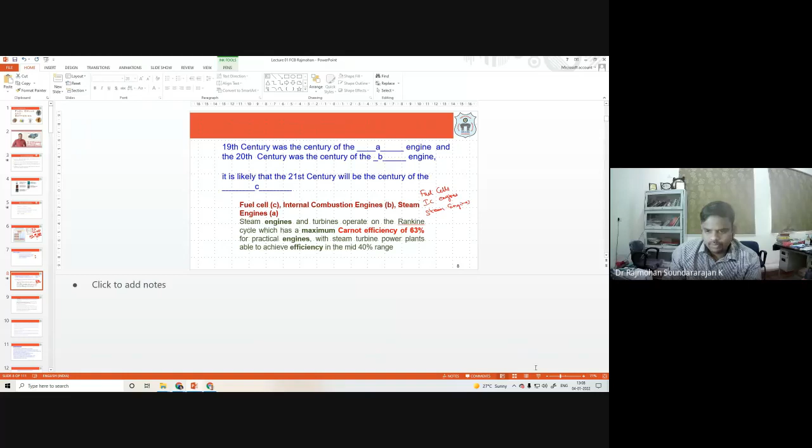Good. A is steam engines, B is IC engine, C is fuel cells. So that's what being projected. But still, this statement was told with the view of the efficiency of the IC engines, efficiency of the steam engines, and what are the drawbacks associated with each.

When we move from one to another, it will have some drawbacks. For example, say you want to shift from one person to a next person who is better. So what you try to do is improve your drawbacks to stop that movement. So we try to improve ourselves, and that can delay the movement from here to there.

For example, we have been saying that across centuries we are moving from steam engines to IC engines, and IC engines to fuel cells. So why this has not happened so far is because there has been improvement in reducing the drawbacks associated with the IC engines.

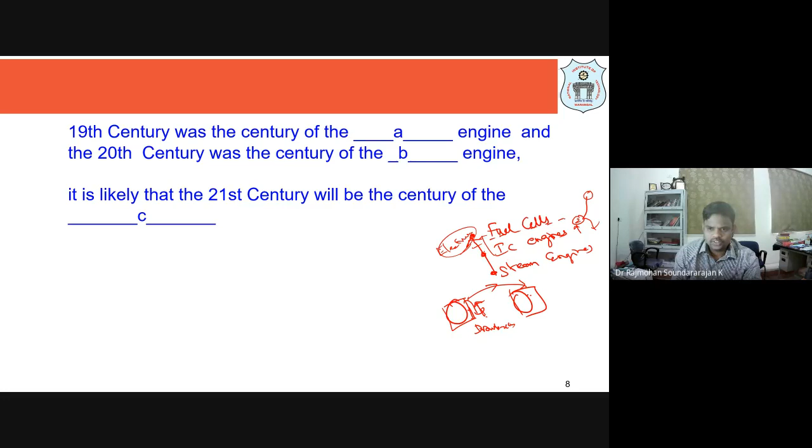For example, when we started, some inefficiency was there, that has been addressed. The polluting emissions have been reduced. So when we work towards that, we are withholding people from moving from this to the next. For example, electrical bikes, electric vehicles—we stop people moving by reducing the operating cost associated with it. When you improve efficiency, the operating cost reduces. So that way we are reducing the drawbacks which are holding the shift from IC engine to fuel cells so far. So the answer is, fuel cells may be occupying the total transport vehicles in future.

IC engines have been on roads in the 20th century. In the 19th century, we had steam engines occupying the roads. We know the basics of thermodynamics from our UG course—I hope all of you are from a chemical engineering background. We know that steam engines and turbines operate on the Rankine cycle, and we know the limitation of Carnot efficiency. We have a maximum Carnot efficiency of 63%, applicable for practical engines. If you look at steam engines, they were able to achieve efficiency only up to the mid 40s, like 45%.

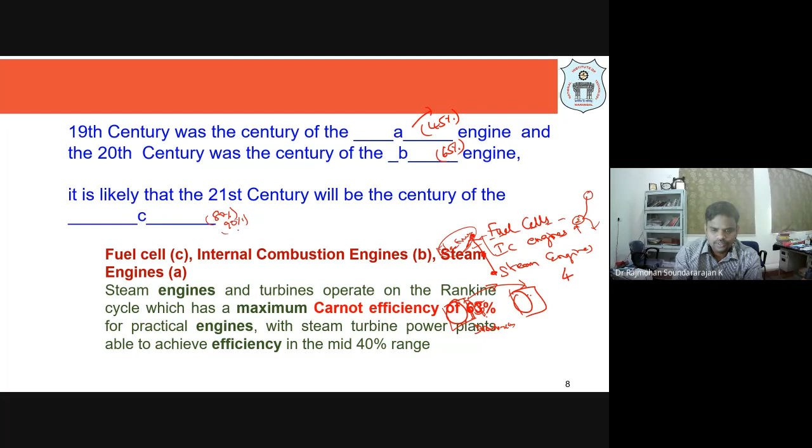That efficiency is what is making people shift from one to another. So whatever a steam engine had, an efficiency of 45%, and this one having an efficiency of 65%—we want to move to something which can have an efficiency of 80 to 90%. That is the objective behind the shift.

So for that, what is energy conversion efficiency? It is a factor which keeps on increasing. As I told you, people keep working on the present thing and try to improve the drawbacks and increase the energy conversion efficiency. If you want to define energy conversion efficiency, it is the energy output in the form of electrical energy to the energy input in terms of chemical energy.

For example, in the 20th century, the efficiency of central electricity generating stations—in models, small scale or pilot scale, they may have had more efficiency, but in actual power generating stations at the beginning of the 20th century, the efficiency was just about 10%. Particularly the average for fossil and nuclear power—once nuclear power plants came, efficiency increased to 33%. Now we have several types of power plants where we have a combined cycle—not just hydro, not just solar, not just heat. In that case, we are able to reach an efficiency of up to 60%.

These newest combined cycle combustion turbines are a combination of a gas turbine, similar to that used in jet aircraft, and a steam turbine. Usually they burn natural gas, and currently they account for over half of the new electrical generating facilities being installed worldwide, not just in India. Worldwide, this type of combined cycle combustion turbine is being used so that we have better efficiency.

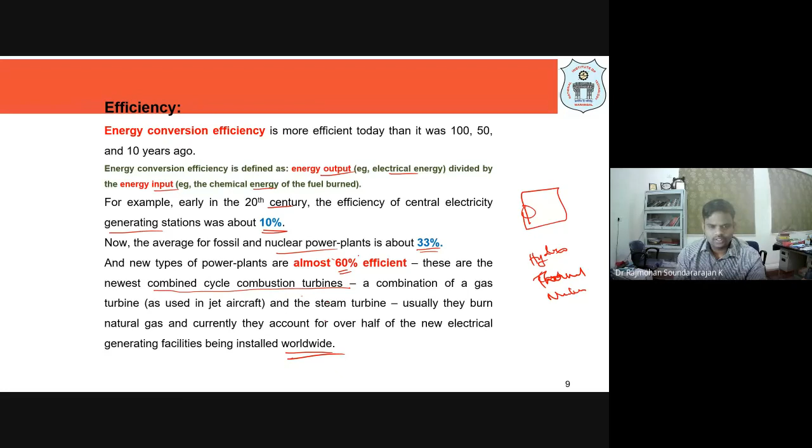Rather than simply hydro, simple coal combustion—meaning thermal—or simple nuclear, when you have this combined cycle, the heat that is generated is also being utilized efficiently, so that means zero is going as waste. Whatever is being generated in a power plant, all the energy is being utilized to get an electrical energy output. That's the combined cycle combustion turbine.

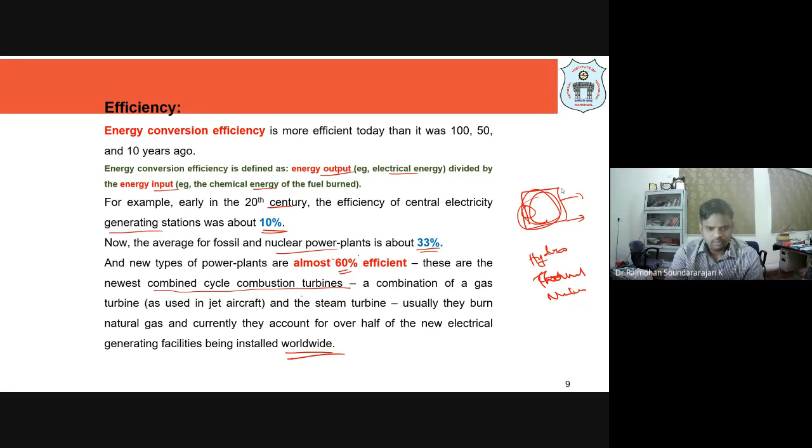As I told you, the efficiency of gasoline engines has been steadily increasing because of developments occurring based on research output provided by chemical engineers, mechanical engineers, physicists, and chemists. This has happened mainly because of two factors: one is our ability to use higher compression ratios, which is controlled by our ability to burn the gasoline without any spontaneous explosion in the cylinder.

Earlier, material of construction was a constraint—we were not having proper materials for high temperature applications. Say, for example, the temperature is beyond 400, 500 degrees. We didn't have non-corrosive, thermal resistant, or mechanically resistant materials.

Proper materials were not there before, but now there is introduction of new materials. We are able to operate at better conditions and control the system with proper control. Process control strategies have been implemented, so we are able to control unwanted incidents from happening. That way we are increasing the safety, and thereby increasing the overall efficiency of the system.

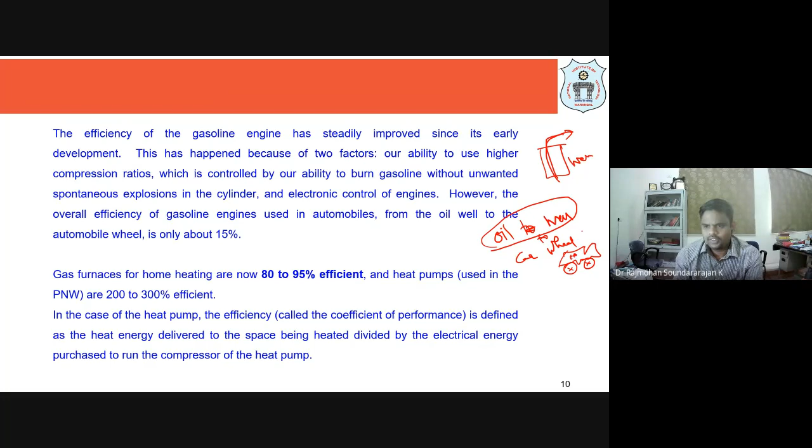So there is an efficiency definition rather than what we talked about, which was energy efficiency. There is another efficiency called oil-to-well efficiency, or oil well to car wheel, vehicle wheel efficiency. That means what is the efficiency with which the oil is being explored from the earth, and from there how we are taking it out till it's running in our car vehicle. So that way, well-to-wheel, oil well to wheel, that efficiency is being defined.

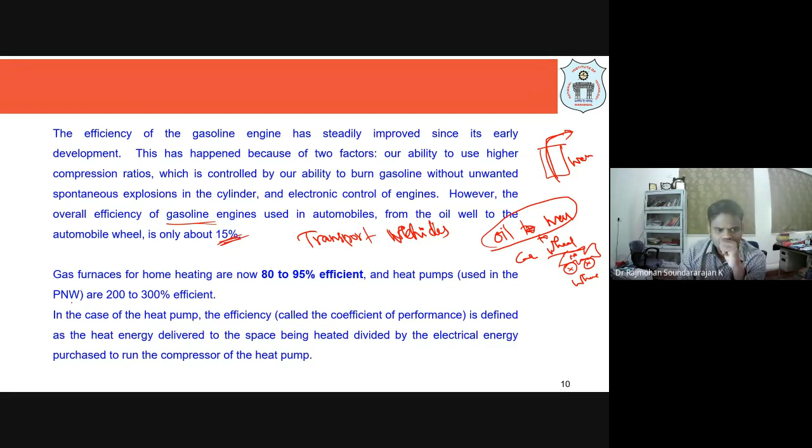So people say that the overall efficiency of gasoline, when I say gasoline, it's petrol, diesel, natural gas, all that, when we are using it to run our vehicle, the overall efficiency is only around 15%. That is the case with transport vehicles. For transport vehicles, from oil well to transport vehicle, the overall efficiency is only around 15%. Now remember, there is improvement with furnaces which are used, gas furnaces for home heating.

Home means, as I was asking, what is the temperature in different places. In South India we don't even need room heaters, but in North India, East India, anywhere above Madhya Pradesh, Andhra, we face extreme temperatures. Summer is also extreme, winter is also extreme. When you reach below 10 degrees Celsius, or even -5 in some places, people from evening time or after 4 o'clock onwards have to make use of room heaters. So gas furnaces are being used to maintain room temperature higher, around 25 degrees or 20 degrees Celsius.

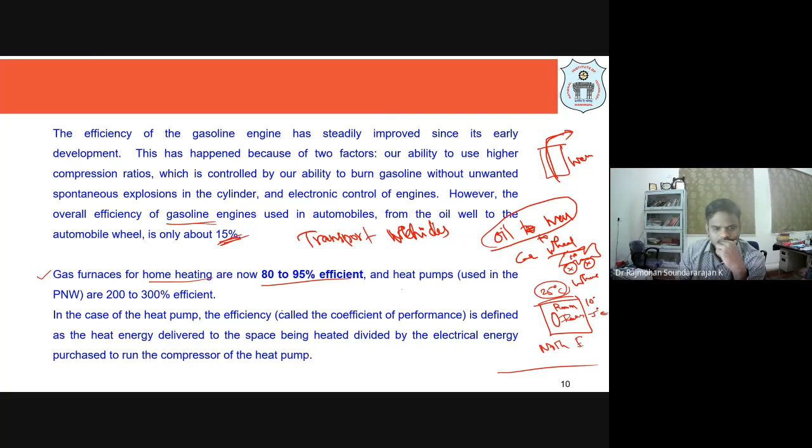So we are making use of some gas furnaces, and now we are able to maintain 80 to 95% efficiency for them. That is possible. In case of the heat pump, which has a different efficiency definition, there is coefficient of performance, defined as the heat energy delivered to the space being heated divided by the electrical energy purchased to run the compressor of the heat pump. So they are working at a very high percentage of efficiency.

Now, if you look at different common heat engines that are available, we've talked about vehicles, but there are different types of heat engines being used, right? Power generating systems are there in many places. So let's look at the efficiencies, take some time to look into it. One of you can read it. Ritwija, can you read it for me? Unmute and speak. Sir, the slide? This one? So we are going to have the name of the heat engine and what is the efficiency. Give a pause for efficiency, then you tell the efficiency.

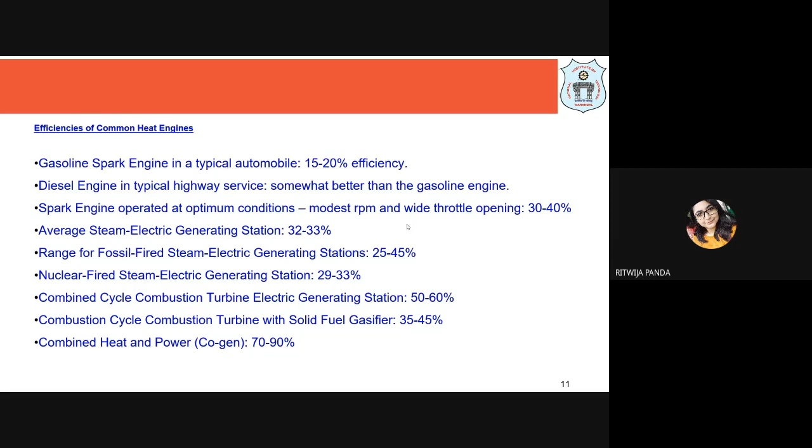Gasoline spark engine in a typical automobile has an efficiency of 15 to 20%. Diesel engine in typical highway service is somewhat better than the gasoline engine. Good spark engine operated at optimum conditions, with modest RPM and wide throttle opening, is about 30 to 40%. Average steam electrical generating station has an efficiency of 32 to 33%. The range for fossil-fired steam electric generating stations is about 25 to 45%. Nuclear fired steam electric generating station is 29 to 33%. Combined cycle combustion turbine electric generating station is 50 to 60%. Combustion cycle combustion turbine with solid fuel gasifier is 35 to 45%. And combined heat and power cogeneration is 70 to 90%. Thank you.

Okay, so you can see the efficiency ranging from 15%, but the moment we move towards this combined cycle kind of thing, the efficiency crosses 50%, right? So 50 to 90% has been demonstrated or is being used in some places, but it's not that widespread an application we could find. Still, as we've seen in the percentage distribution, coal remains the major player in the generation of electricity, right?

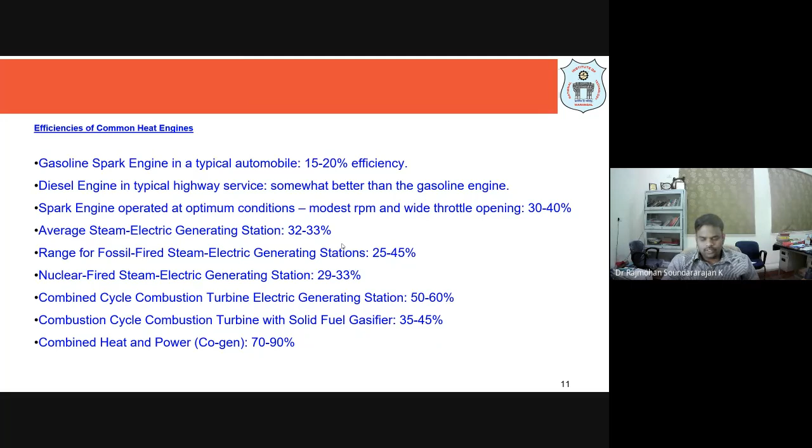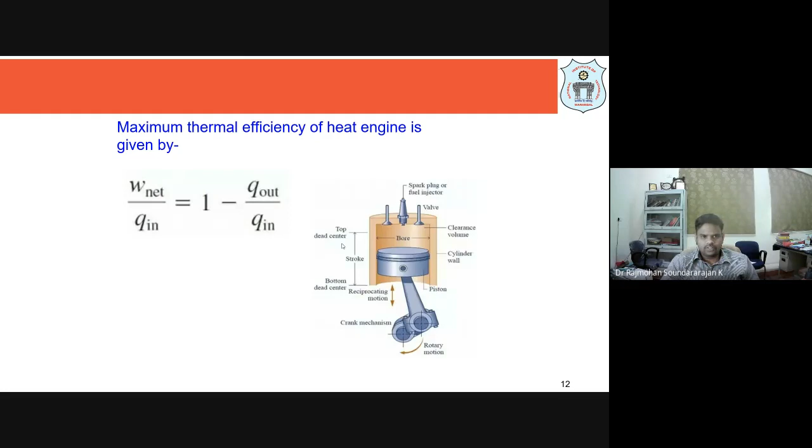So if you look at these efficiencies and how thermal efficiency is defined, I hope in thermodynamics course we have studied how this thermal efficiency is defined. And we know what is this Carnot cycle, all that we have seen. And now there is...

Toyota has now developed a new gasoline engine which it claims has a maximum thermal efficiency of 38%, which is greater than any other mass produced combustion engines. With different capacities of 1 liter, 1.3 liter, they are able to enable 10 to 15% greater economy than their existing equivalents.

So why am I saying this? First we showed a statement that the 19th century was that of steam engines, 18th, 19th, and 21st. The 20th century was IC engine, but the 21st was told to be occupied by fuel cells. But what is the resistance provided in the transformation? I am just explaining, right? Because there is a lot of improvement in IC engines, because the moment it started working at 10% efficiency, in the 1950s, when we talked about fuel cells, people said it is going to replace that one.

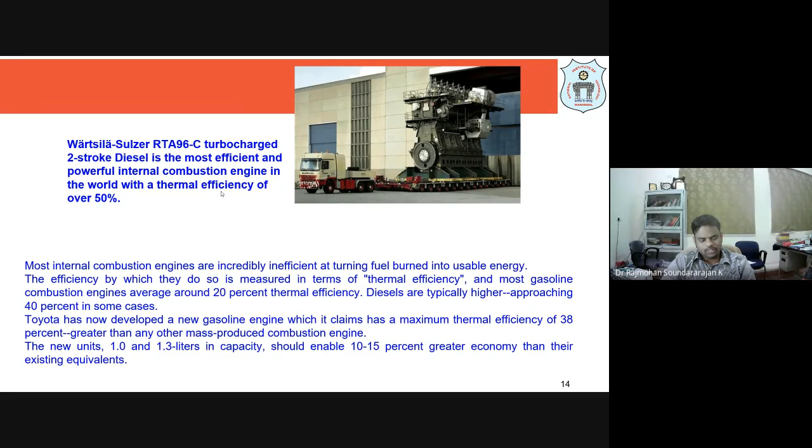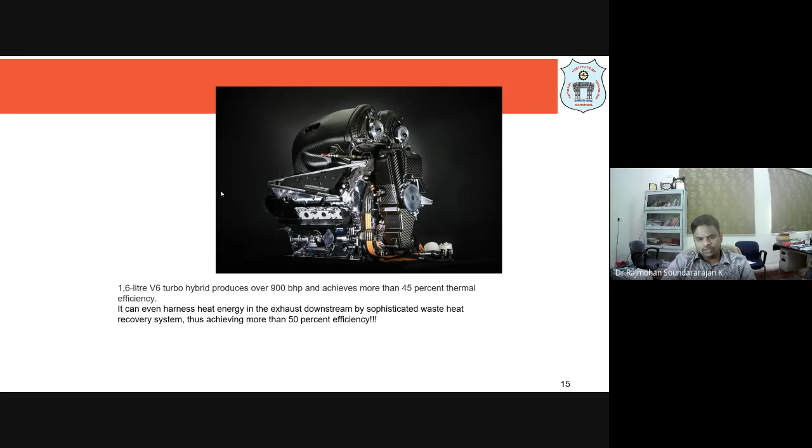So a lot of turbo hybrid products have been introduced with more than 50% efficiency. Mainly, they made something like this: it can even harness the heat energy in the exhaust downstream by a sophisticated waste heat recovery system. What we use here are heat exchangers. Whatever heat is leaving out, we try to recover that heat also. That is where we are improving the overall efficiency to more than 50%.

So in that way, if you look at the emissions taking place, and if you look at the comparison well to wheel, I was talking about well to wheel, right? What is well? Oil well to wheel, what is the efficiency? If you consider overall efficiency, how it is taking place. So you can see that gasoline, advanced gasoline, which has fuel production engine efficiency, fuel to wheel efficiency is given, well to wheel. WW refers to well to wheel efficiency.

And what type of emission it is causing, and how much CO2 grams per kilometer is being released. So if you look at this, grams per kilometer refers to when you are running for 1 kilometer, how many grams of CO2 are released. Can you see the efficiency? Well to wheel efficiency, fuel to wheel efficiency within the engine efficiency is around 36 for this. So if you compare gasoline, fuel means the fuel charged into the vehicle, and the efficiency is only 18%. Well to wheel efficiency is also almost 15%, which releases more CO2, 220 grams of CO2 per kilometer driving.

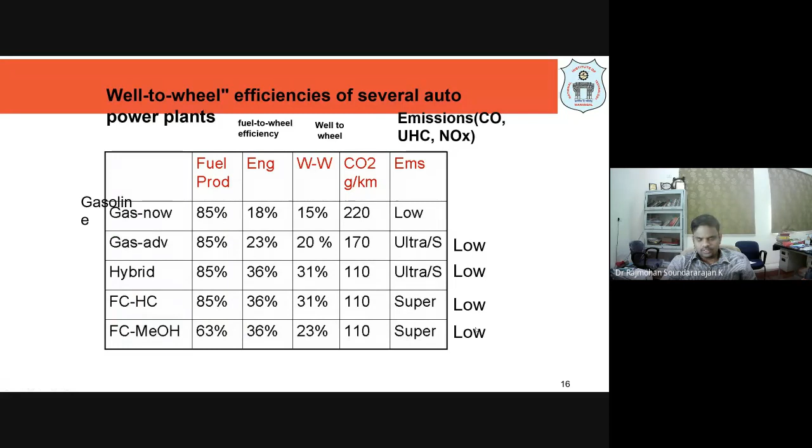The advantage of fuel cell is that instead of directly using hydrogen, whatever natural gas is available can be used as the fuel, which will produce hydrogen within the system, and then the hydrogen and oxygen will combine to form the fuel cell. Water splitting also takes place, right?

So water splitting also takes place, so we'll see that here. What is the reaction taking place? Hydrogen plus oxygen forms H2O. So water formation is the fuel cell reaction. When we say water splitting, that is the electrolyzer. I hope from 8th standard onwards we have studied about electrolysis.

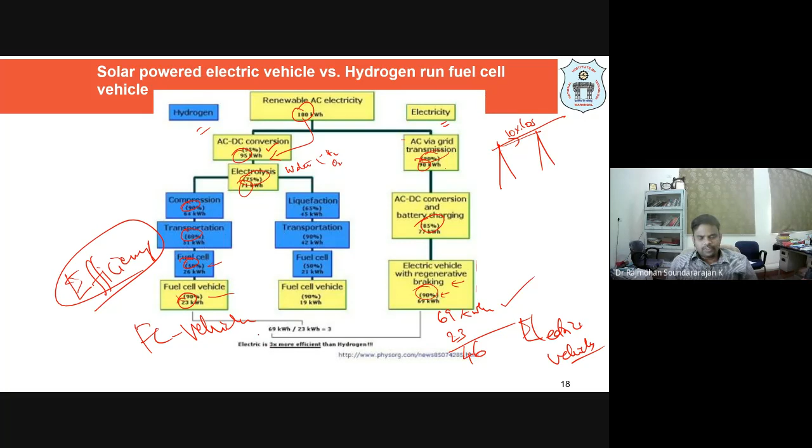So what is our responsibility if we are learning as a chemical engineer? Can I improve the efficiency somewhere, by 50%, 60% compression, right? They are limited technically. So where I can work to improve the efficiency of the steps involved, I can compete these fuel cell vehicles with the electric vehicles. That is the challenge in front of an engineer who is working, having interest to learn and work in this area of fuel cells. There is a lot of loss taking place even in this case also, so we have to improve on it.

Actually, it was even told back in 1923 - JBS Haldane foretold that the future fuel of the world will be liquefied hydrogen obtained by electrolysis of water, with the energy sources being the wind. That means if you are able to use wind energy, wind turbines, and generate electrical energy from wind, it is going to be run with liquefied hydrogen. Liquid hydrogen will be the thing, the future, as was foretold in 1923.

As I told you, this has been halted with improvements in the IC engines. Since they improved the IC engine, they are able to retain the customers. They are able to increase the efficiency, reduce the pollution, and so we are able to retain the same IC engines.

So is any source currently available to provide us electrical energy? We know the population is ever increasing, and there are ever so many gadgets coming into the picture. Whatever was manually or physically being done is now being done with some electrical or electronic equipment and gadgets. So to charge them, we need electrical energy. With the increase in population, each person nowadays has 2 to 3 mobile phones, so to charge all that, and at home also a lot of appliances have come.

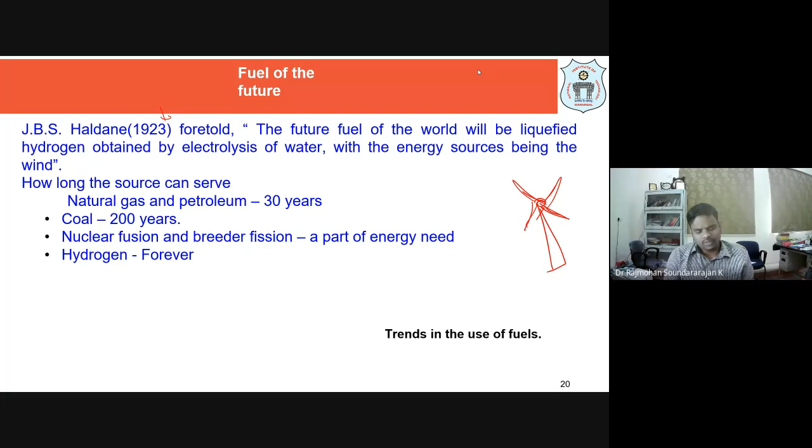If you compare this with hydrogen, hydrogen is available forever. That is the reason we want to move towards a hydrogen based economy from a crude based economy, because crude oil price is ever increasing. Even if it decreases, we are not going to have any reduction in petrol prices. So they will all get over at some point in the future.

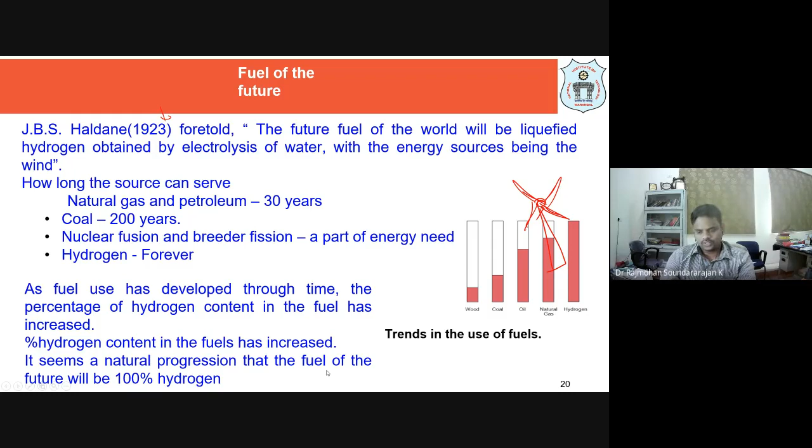If you look at the trend of people moving from wood, coal, oil, natural gas and hydrogen, we can see there is an increasing trend in using hydrogen as fuel. The percentage hydrogen content in fuels has increased. It seems a natural progression that the fuel of the future will be 100% hydrogen. That's what is being predicted, and we also want it, as the Indian government, as a sustainable thing.

Why should we move towards hydrogen fuel? There are a lot of advantages associated with hydrogen. It is the lightest of all fuels. In the vehicle, the weight consumed by vehicle weight versus fuel weight is going to be very less, since hydrogen is the lightest element.

Also, if you consider mass wise, per gram of fuel, the energy is going to be twice that of gasoline. For example, it is 29,000 kilocalories per kg, whereas gasoline is going to be about half of this value.

Combustion with oxygen gives water as the product, which is harmless, and it can even directly burn with oxygen in a turbine. It can be oxidized with oxygen in a fuel cell. It can desulfurize coal and petroleum to provide cleaner power as an energy carrier.

It can be easily pumped in pipelines and stored as gas. In all forms we can store hydrogen - as compressed gas, or we can liquefy it and store it, or absorb it into the gaps and pores available in solid hydrides. So storage is easier in comparison to other things, and we can store them safely.

It can also be transported using rail cars, or using double walled dewar tanks. Off-peak time power in conventional electric power stations can be used for generating hydrogen, which can be used for future usage. So there are different methods of hydrogen production.

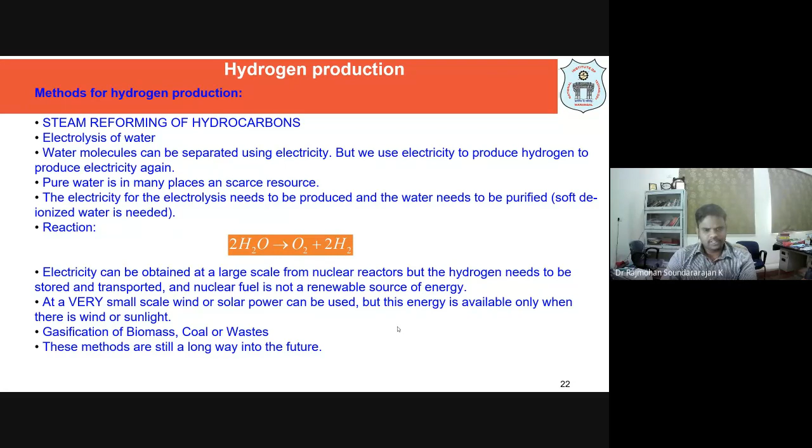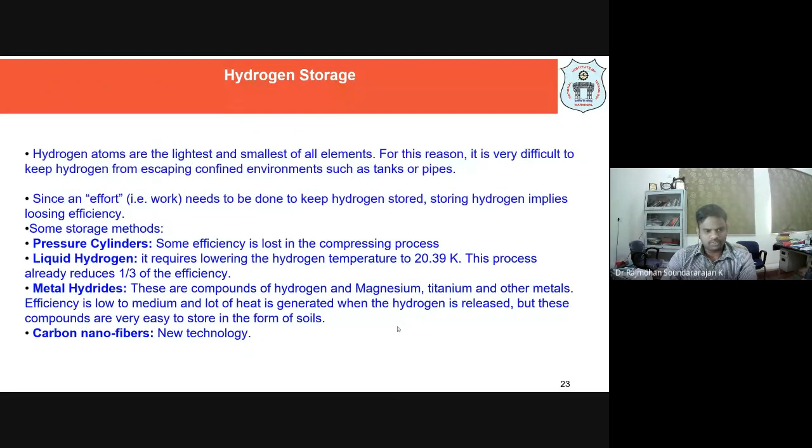So we have different methods of producing hydrogen, which is listed here. Anyhow, hydrogen is a separate chapter we are also going to discuss. As I told you, this hydrogen can be stored in gas form, liquid form, and solid form also. With the invention of nanomaterials, we are able to store it better too. In the next lecture we will see more about this.